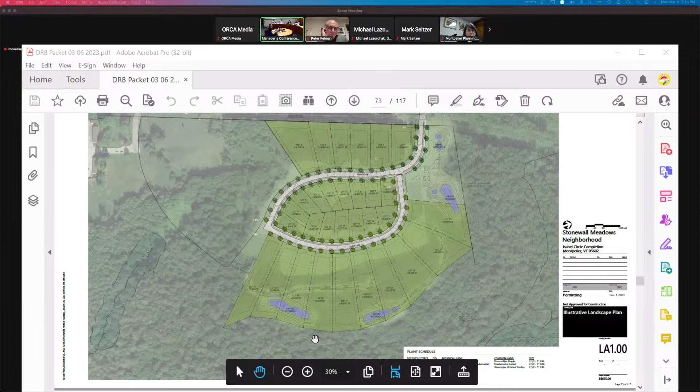To the north, which is on the plan right, we have 2 stormwater management areas. And then at the page bottom, which is the east side of the parcel, we also have 2 additional stormwater management parcels. Those are constructed gravel wetlands that provide attenuation and treatment functions, and they fully meet the DEC requirement for the treatment standards.

Since we submitted the sketch plan approval, we did some infiltration testing and tried to figure out what the seasonal high groundwater was. It's more tight soils than were mapped by the NRCS when they do the broad-based community mapping. So these aren't infiltration practices, but they allow us to hold back the 1-year storm and discharge that through a 1-inch orifice over 12 hours. So it still complies with all of the treatment standards that DEC requires.

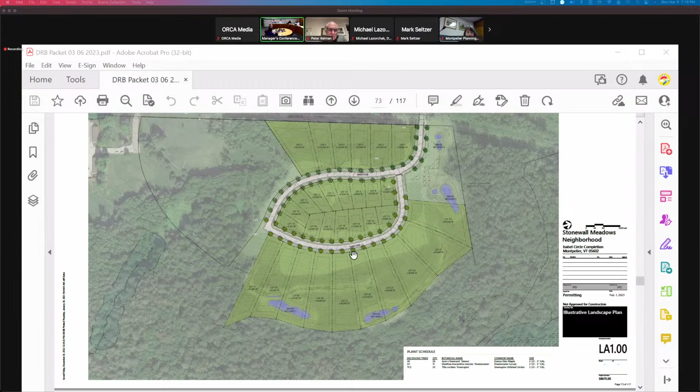We also looked at the roadway alignments. Isabel Circle does not exceed 10% grade, and we tried to follow that along the existing grade, so it doesn't deviate more than a couple feet throughout the profile. And Isabel Loop follows along close to the grade similarly as well.

Trying to go to your grading. Sure, yep. One of the great assets of this part of the parcel is that we're able to provide municipal water and sewer, and using gravity, we don't need pump stations. So as far as municipal infrastructure and reliability, it's great that all of these parcels can be served by sewer mains that flow from the page left to the page right.

So that would be the southeast part of the parcel up to the northwest, where it connects to an existing sewer main on the end of Isabel Circle, where it currently terminates at the parcel.

The vegetation is on the steeper slopes of this parcel, but this area, this 20 acres, is the flatter portion of this parcel. It's a 70-acre parcel overall. So on the 20 acres, we performed the steep slopes analysis.

We're able to provide a DEC compliant erosion control plan and stabilization plan by using sediment traps. Each of the 4 gravel wetlands will be, during construction, sediment traps, and we'll use silt fence to provide temporary runoff protection. Then at the completion of construction, all the areas through seeding, mulching, and stabilized erosion control blanket will be vegetated.

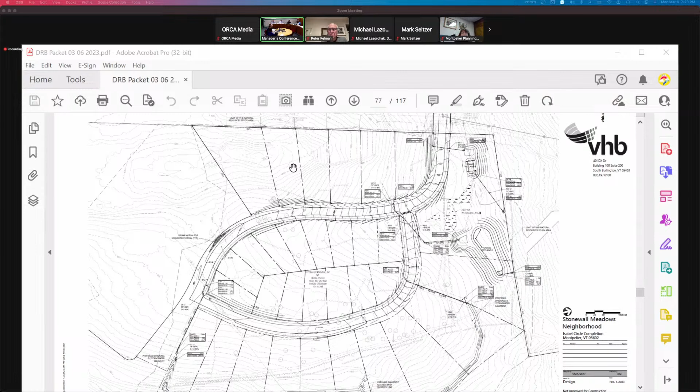I think this can be addressed easily enough. Yeah, that's what the board has done before. We haven't seen this in a long time. I don't know if all the members here have seen it, where we've had issues. Hold on, I'm going to stop my share.

Because of the way the regulations are drafted, we're supposed to have a final signed and sealed set. So after any tweaks made during the DRB process, you can just have that as a condition of approval, that a final set of plans complying with the board's decision is provided to the zoning administrator, signed and sealed with the stamp. Okay, that's an easy one. Great.

Moving to the next significant comments in red, on page 11 it talks about erosion control measures and the steep slope analysis. There's a lot in the zoning ordinance about quantifying and tabulating the amount of slopes and various slope ranges. I agree this parcel warrants the analysis of erosion control measures. Those measures we designed adequately address all the slopes the project is located on, comply with the DEC construction stormwater requirements, and fully meet the intent and requirement of the steep slope provisions.

Okay, any questions about that, members of the board? Yeah, and this was just as long as we get a copy of the permit, the board can approve it, because if the state's approving it, then generally the city's review of that is waived. Okay, thanks, we can keep going.

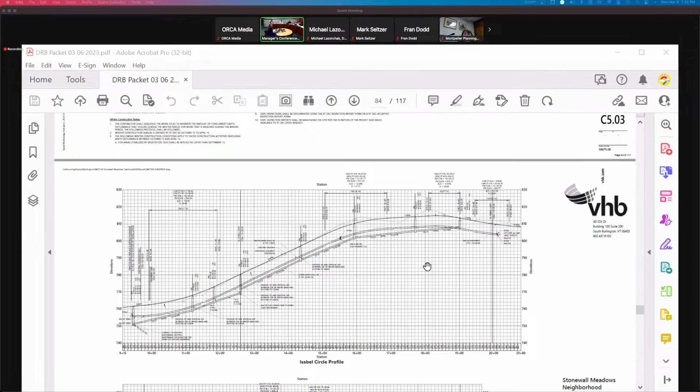Which one? I wish I could point better. Which document, which drawing, any of the plan views, which intersection? Let's see, LA 100, it's a landscape architect sheet, go back up, it shows the grade. Yeah, so if you zoom in on the intersection there, as you can see...

Left to right, all of those contours on the roadway are generally evenly spaced. You have a nice continuous grade there, as opposed to making it steep to the left of the intersection and then flat through the intersection where the contours are spaced further apart, then steepening again. You'd want to flatten that out through the intersection if the road passed through, because you don't want cars to go sideways.

The cars leaving the subdivision will turn to the right and follow that grade. The cars coming down the hill from left to right aren't generally making a turn to the right. It's at 10%, so for low volume it'd be safe. If that were a high volume arterial road, you'd want to flatten it out with vertical curves on each side, but since it's very low volume, a constant grade through there makes a lot of sense.

All right, let's pause. Any thoughts or questions from the board? I think you answered the question, but...

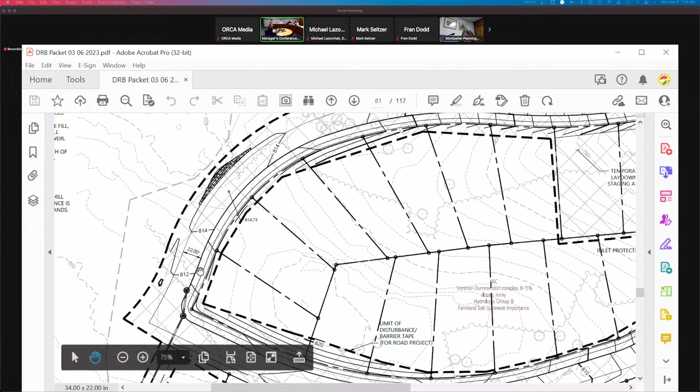Just to clarify, within the Isabel Circle development into the loop, are we talking about a similar grade all along there, on both the circle and the transition? So here it's 790, this is 780 here, 790 here, 800, 810. Here it's 800. So it's going up and this is going up, and then it levels out here for a while at about 810. Here it's a little steeper at the peak, because of the way the grade is, that's why all the water tends to flow this way or this way. But this is still much flatter and even than other parts.

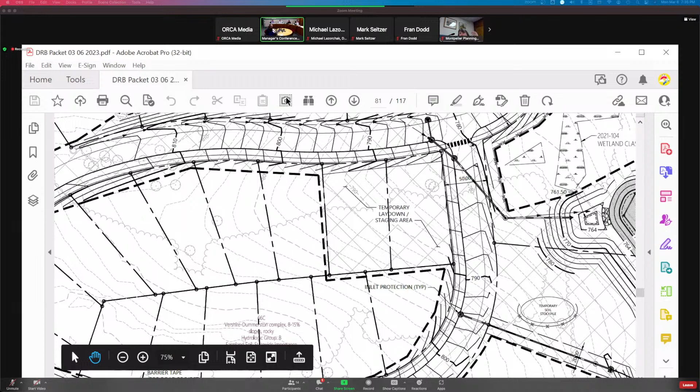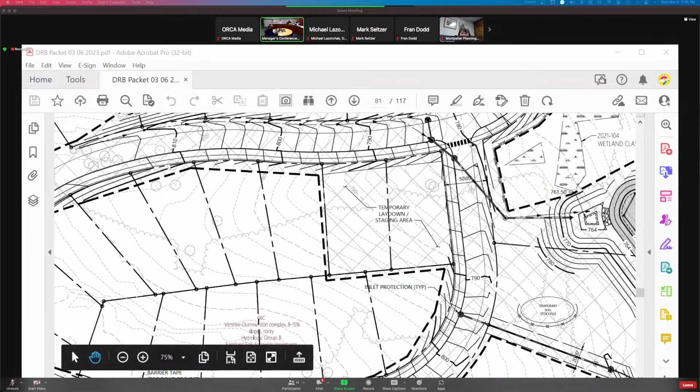Any other questions from the board about this part? The Public Works Department comments are pending. We've gotten some comments from Corey, so that's what we're addressing, and I think we'll need to follow up with DPW on the road, and we still need stuff from DPW on water, sewer, and stormwater. The current status is things look like there aren't any major speed bumps. Corey had some little things Jeff's addressing. I think you and Corey met today, so we'll get a written follow-up after that.

That's going to be a really important activity in order to get this understood in the larger sense.

Just something that occurred to me, maybe it's in all the documentation, and it's a lot of documentation. What is the potential number of units that could be built with this current configuration? Approximately 84, based on the gross density of each lot if built to the maximum gross density for the 31 developed parcels. The project as presented to us now does not have structures as part of the application; we're just looking at the land, the subdivision aspects. So we want to keep in mind that though the project is limited to land development and grading, it is just a prerequisite for a housing development that will follow. That's my only comment.

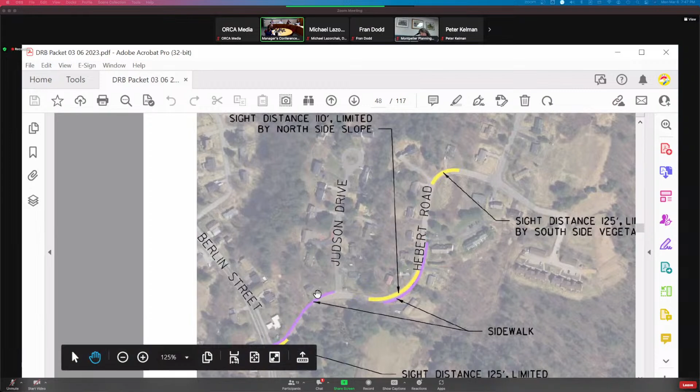Are the walkways on both sides or one side of the proposed street? The new or the existing? The existing doesn't have one on Isabel Circle. Hebert has the two, but once you get to Isabel Circle there weren't any. It's just the single side that I'm proposing in this case.

What's the width of that sidewalk? I apologize, I don't remember that off the top of my head. I could take a look and see. I believe it's just standard sidewalk, so I'd guess 5 to 6 feet, but I don't know for sure.

And DPW will be reviewing that and signing off on it. Yeah, so you're talking still about the new sidewalk in the loop? Yes. So Corey's taking a look at that, and for most of that stretch of sidewalk, 5 feet is fine.

I'm trying to remember - he said one of the things he raised wasn't an issue because you don't have sidewalk on the side where you're looking at potentially 4 units. It's all on the inside of the loop, but he had talked about maybe needing to widen it to 8 feet, though that's for the higher driveway standards, and there's no sidewalk there. So that comment came up, but it's actually not an issue.

So 5 feet is the sidewalk width in all locations. His comment was related to the depth of the sidewalk - the 8 was inches of depth. According to VTrans standard, it's made thicker across commercial driveways, so they're considering a 4 unit home to be a commercial driveway and requiring it thicker. I missed that, okay, thank you.

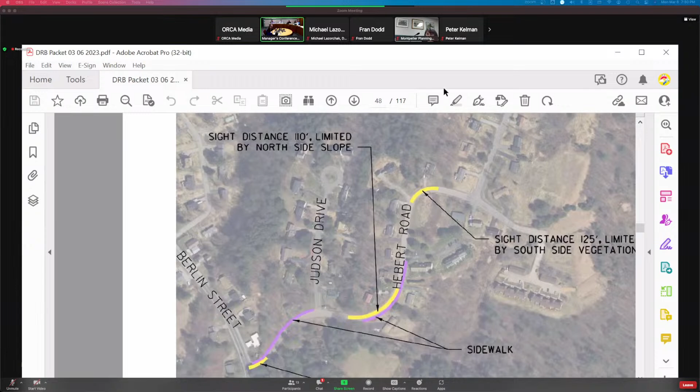Regarding the access, the slopes and the limited area that the project occupies, which is in the northwest corner of this parcel, access from a second point is not feasible or practical. Additional roadway would need to be constructed that would significantly increase intensity of the development or impact additional forest, possibly wetlands. So when you look at the scale of development and the ability to access this adequately through Isabel Circle, we feel there's no other feasible way to make this project work.

Yeah, give me a second - it's faster for me to scroll if I'm not actually sharing. Trying to do too many things at once. In other words, don't continue. Right, just be good to get visual.

So here's going to be the extension of Isabel Circle, right? And to get back over to Hebert would require going around, because this is city parkland here, so it would require going around that, connecting through and getting over here, or maybe somehow doing something down to here. And there's a lot of steep terrain here, and a lot of wetlands - you can't see them here, but they're marked on other parts of the plans.

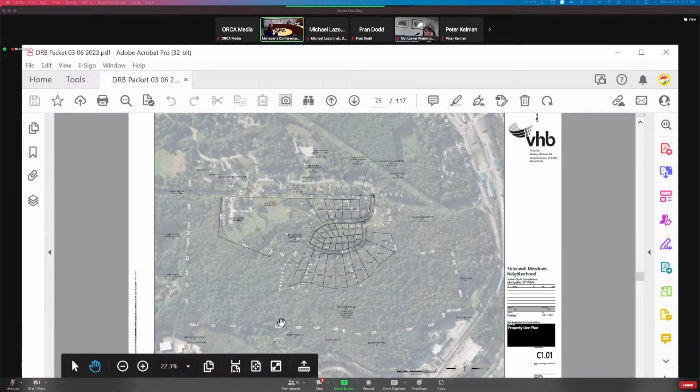And regarding Hebert, I do not believe there's access - this parcel doesn't front on that road, so there's not even legal access on that side of the parcel. Considering the 302 and Route 2 and River Road connections down there, there's a lot of other parcels along there. And even if you could get through those parcels, the zoning ordinance discourages connections to arterial roads. So that's kind of the paradox there related to the desire not to connect to state and arterial roads.

Yeah, because then this becomes a pass through for major lines of traffic. So you're really increasing the traffic on that connection between Hebert and Berlin Street, because you start having people using that as a shortcut.

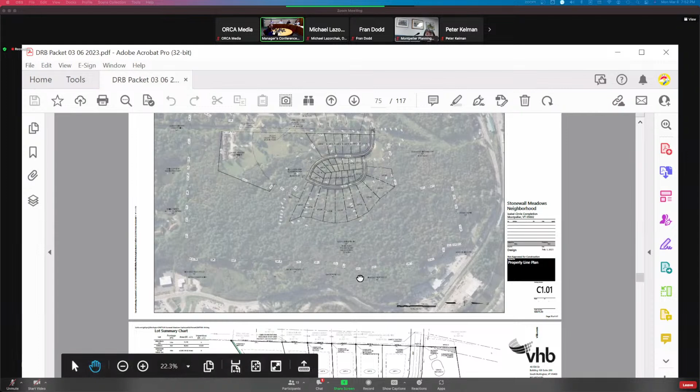The parcel between 31 and 6 in between, is that the land trusted 5 acre city property? I don't know if it's land trusted, but this here is city parcel - 20 acres owned by the city. How many acres? It's about 20. There's a little question about it, there's been a couple of surveys, but yeah, it's owned by the city, it's city parkland.

Catherine, did you have a question? Yeah, quick question. Earlier, when talking about the missing sidewalk, there was some reference to the city's bike and ped master plan. Right now we're obviously talking about vehicular access, but can you confirm if there's any other pedestrian access or trail connectivity, or any other way for people not in a car to get in and out of the site?

There's a lot of meeting with homeowners and talking to people. There are a lot of unmarked, self-maintained trails throughout there. So I can't say whether there aren't, but the remainder of this parcel is used for recreation. I don't know along 302 whether they can hike up into it.

Okay, so just to confirm, you basically can't really comment on that aside from the existing recreational use. I mean, I'm sure some of the neighbors know more than I do, but going throughout this neighborhood, there are trails from where this road will be directly into the park, and trails that continue along the backside of where the condos are, in the unused part of the land. So if people needed to hoof it somehow, they certainly could do that. Okay, that's part of the concept.

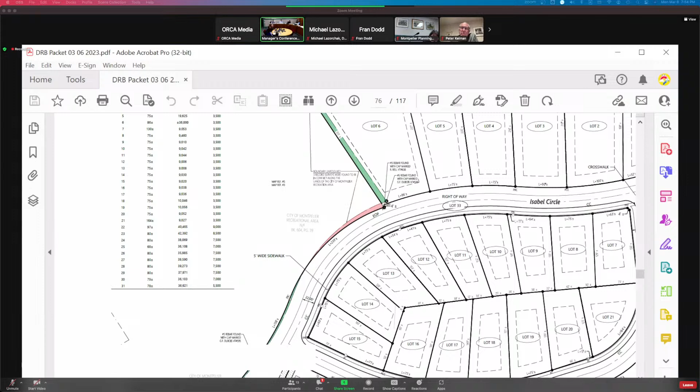So one of the comments was to crown the road. We suspect we'll be able to modify the cross section to crown the road in accordance with their desires. It does not alter where the stormwater flows to — with the exception of stormwater flowing off from the center line of the road in each direction, all of the runoff still goes to the same stormwater management practice, so that change will not alter the stormwater management plan.

One other comment, a relatively minor one I think, but it seemed like a bit of wasted money — I wouldn't want it to be a condition of approval to provide secondary or redundant additional spare conduits for future telecom use. Conduits will be provided for phone, telecom, and cable as part of the project initially. Adding an additional conduit for who knows what — given the current state of directional drilling and fiber optics, I feel it'd be more appropriate for an additional telecom provider, should they want to provide service, to do so through directional drilling, which is basically drilling horizontally under driveways to pull boxes. Any thoughts or concerns from the board about that?